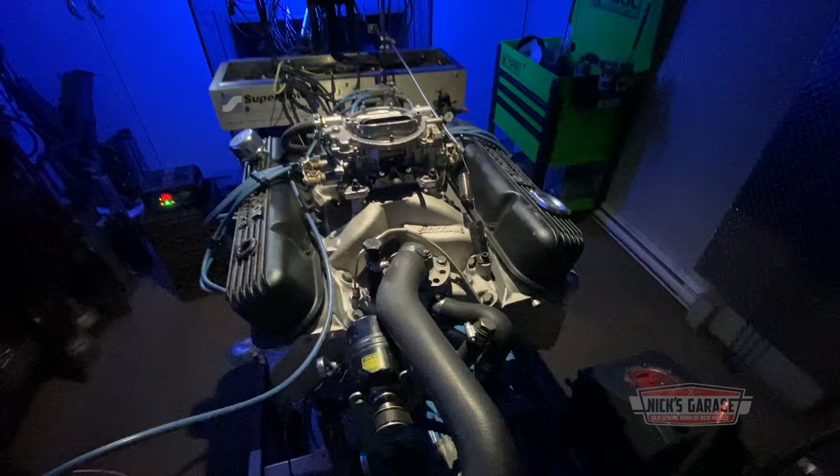Hey guys, we're back in the dyno room with a 360 stroker. Question is, are we gonna get the same power of a Hemi out of this small block stroker?

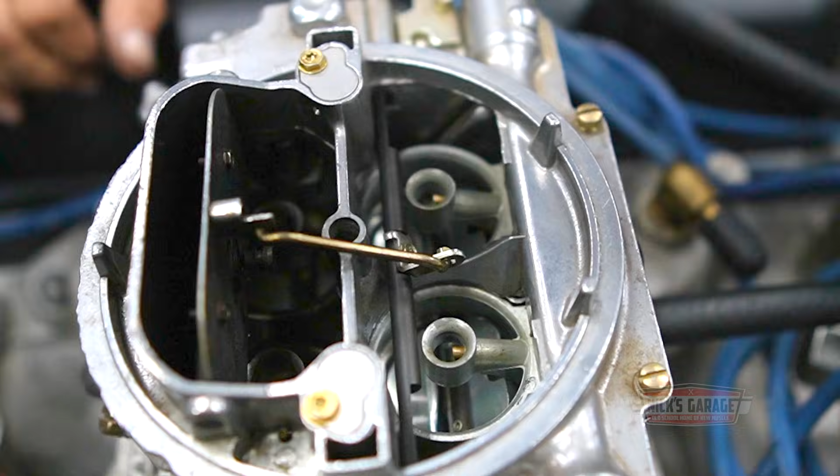Hi, I'm Nick. Welcome to my shop. And yes, here we are, back in the dyno. Today on the dyno for testing is this 1974 Chrysler small block that started life as a 360.

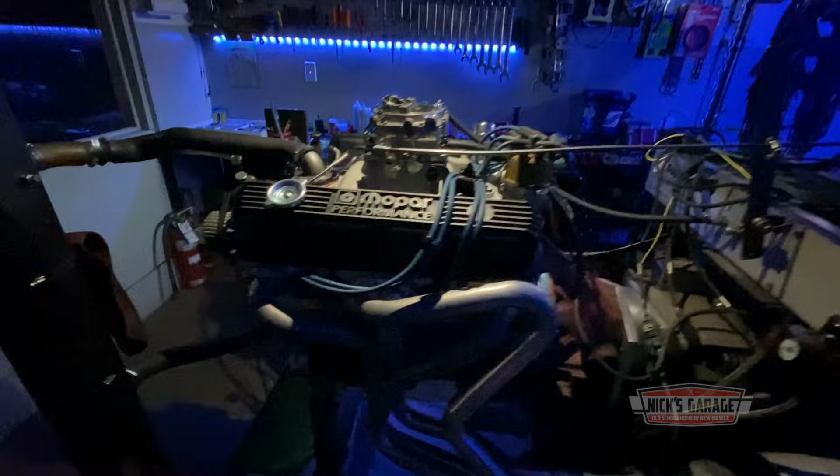Jeff with the Barracuda from Ontario brought it in. He told me put the engine on the dyno, see what it does. We found a few problems with it. First, when we had to test it, didn't make much power. Second, he lost oil pressure when it got hot and it went to idle and dropped under 15 pounds of pressure. So he told me, tear it apart, Nick, and let's build it.

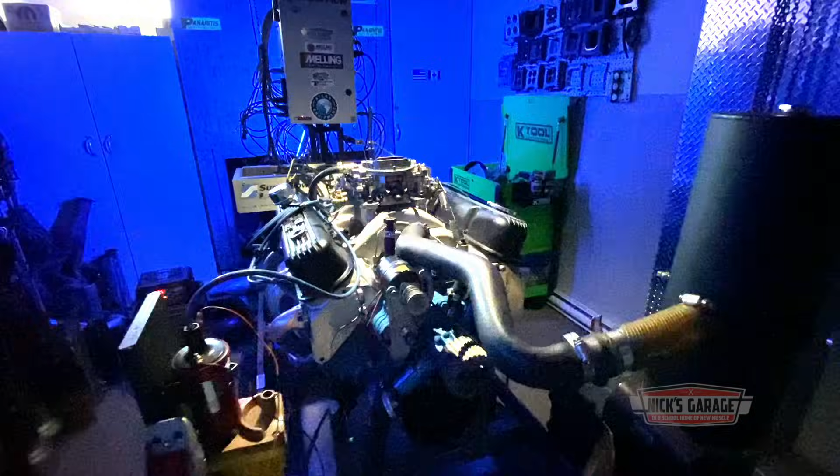When Jeff bought the car, he was under the impression that the 360 had been stroked out to a 408. But when Nick pulled it apart, he found out it was still at stock displacement. It was just a basic 360 with the Edelbrock heads. So he told me to overhaul the engine, buy a stroker kit, install it, and make it a 408, which is right now a stroker engine, 408 cubic inch. Now the engine is what it was supposed to be and has been built to Nick's standards.

It's time to find out what kind of power and torque it will make on the dynamometer. So all we have to do today is warm it up, get it running, mix up tests with this Edelbrock 750, and then see what power and torque we're gonna get. After that, we're gonna go to the 750 Thumper. I also have his original carburetor that came off the car. We're gonna test them all, and whichever works best will end up in the car.

So this is what we got. He wanted to stick with a small block. It's a '74, a low horsepower engine from the factory. So what we got here is something a little bit more different and more towards his specs. So let's hope it does well.

So we're going to do some dyno testing, and we got some special guests from Tennessee, USA. We got Rod and Irma from the USA, and they're here to see us doing a show. At the same time, we're going to do a little video on it.

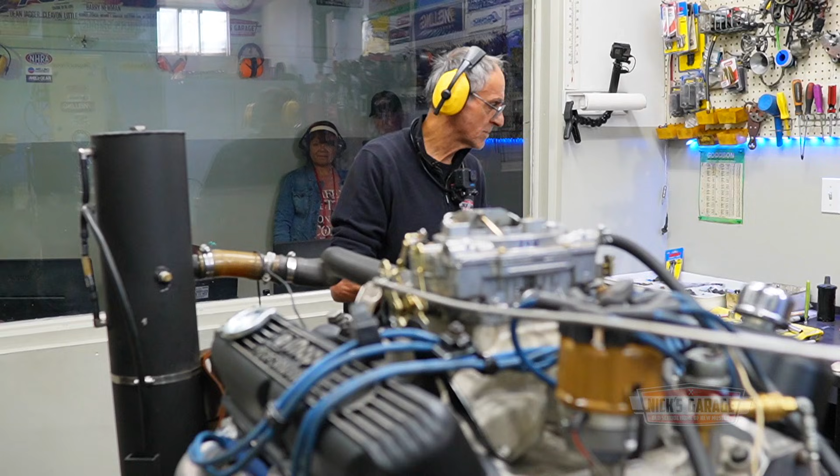Shut the water pump so I can get it warmed up. Oil pressure is good. Vacuum's good.

Okay, let's see what it's gonna do. Oh, battery voltage is up. Take a look at that. Bring it right back.

Check the timing before we go anywhere. The air fuel ratio seems to be good, for idle that is.

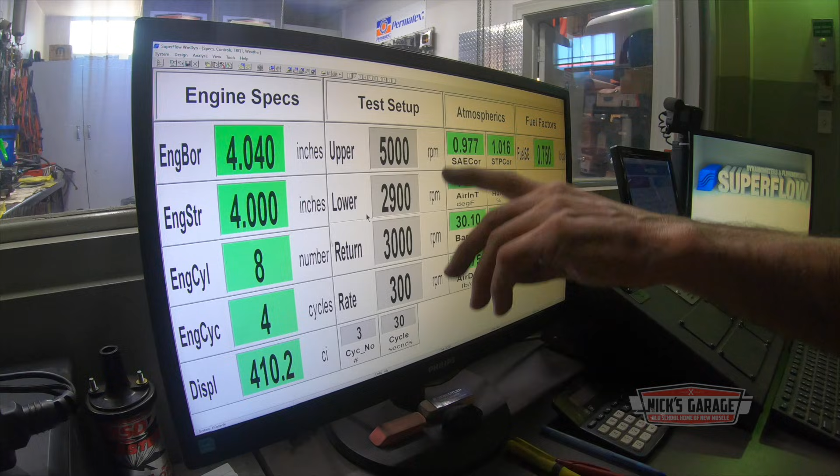I'm going to take the test at 2,900 to 5,000 RPMs, at 300 RPMs per second. Here we go, you guys ready? Let's see if I don't need to adjust the absorber. Well, you know, this is not going to be an official test. We just have to heat up the block, heat sink the block.

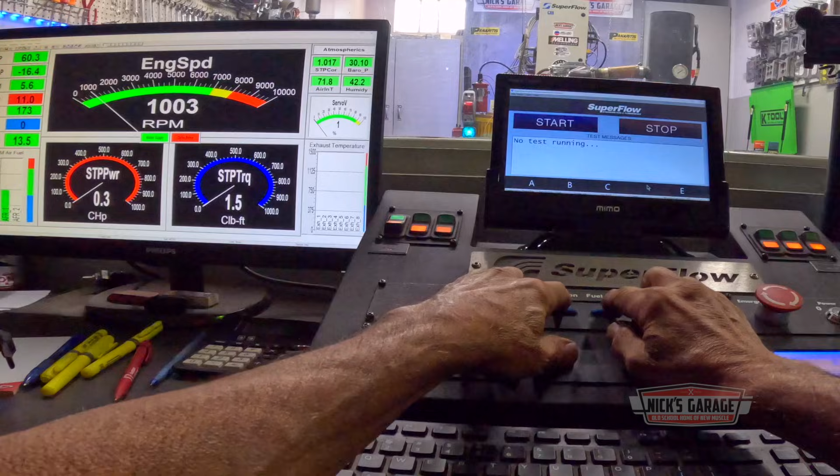Take a look, so far so good. Let me check the oil pressure. We lost oil pressure on idle hot oil. We had just under 15 psi on this particular engine, but now that we had the crankshaft replaced with a stroker and all new bearings, new oil pump, this is our oil pressure on idle.

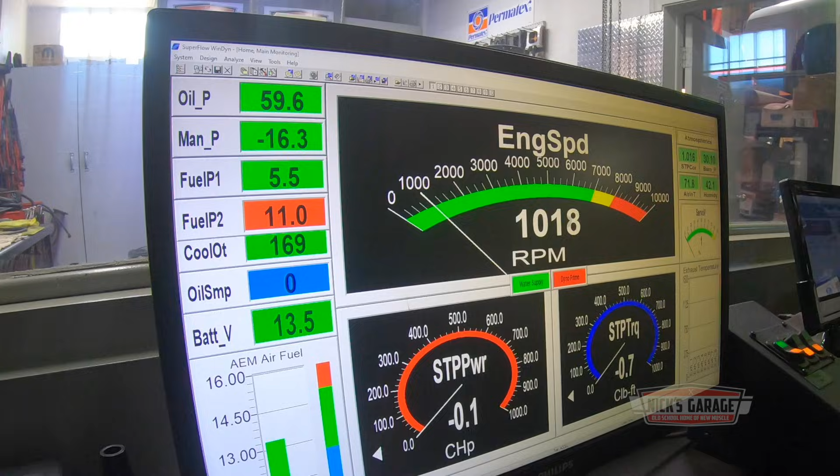Now that the oil is warmed up, I got the timing fixed up, and now we got a 750 Edelbrock. So we're going to do further testing later on, but with the Thumper carb. Right now, let me do a few tests with the Edelbrock. Air fuel ratio, it's on the rich side.

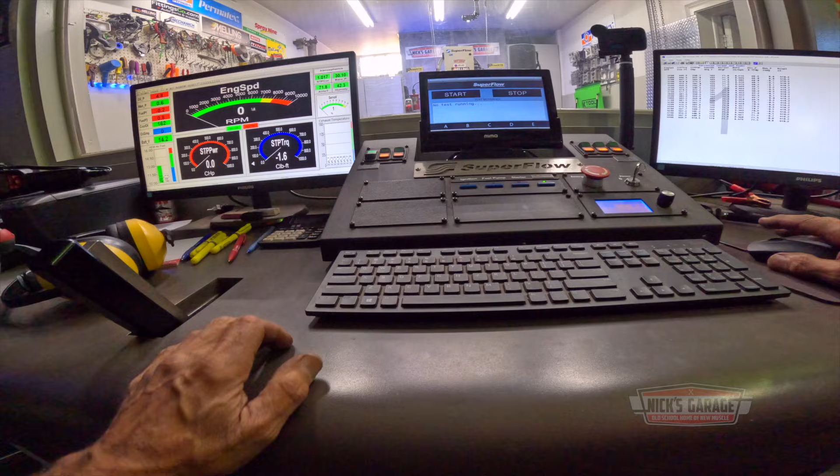Okay, I'm just going to make one more run. And it seems like we're going to have to go higher than 5,000 RPM. So here we go, we're going to bring it a little bit higher. We're going to take it to maybe 5.5 or 5,300. Here we go.

Okay, is it loud? It's kind of loud, eh? It sounds good though, okay.

I'm going to do another test back to back. Looks good. The air fuel looks a bit on the rich side, but anyways, you know what, we're not going with this carburetor anyways. I'm going to try the Thumper later on, and after that I'm going to try the client's carburetor that he has here also. So we're going to go through some carburetor tuning here today. All right, I'm going to do another test back to back.

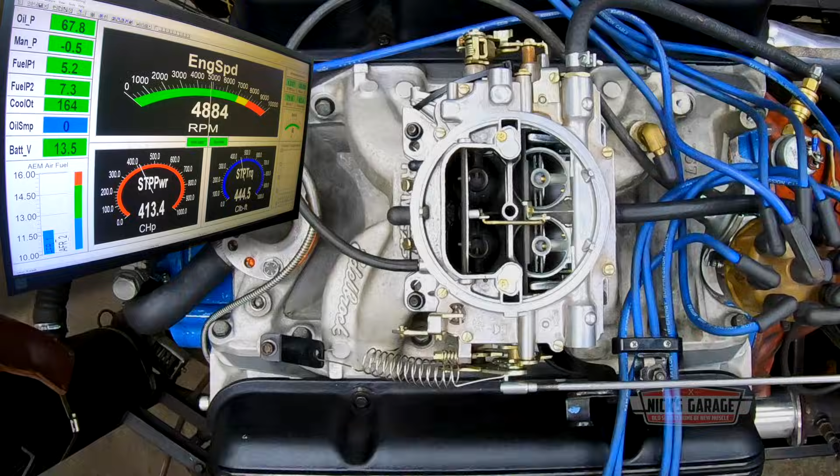Stopped at 52, 53. Wow. You know what they say, 1 horsepower per cubic inch is pretty good. Here we are at 415 HP.

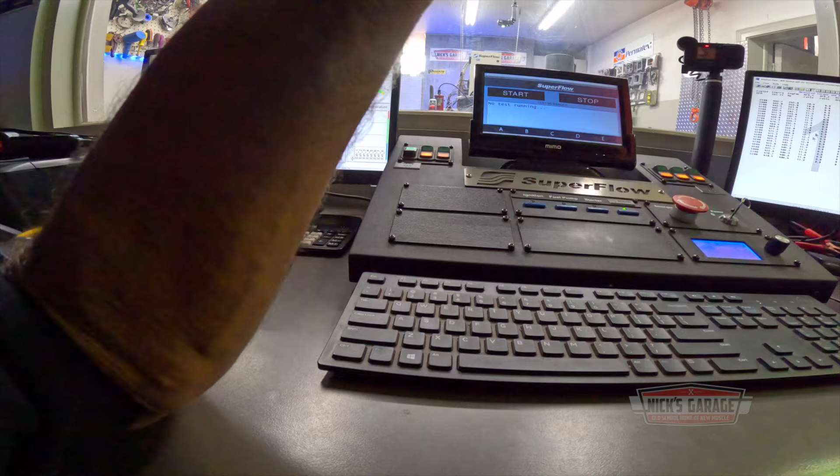We're still going to play with air fuel ratio. It's kind of on the rich side. Yeah, it's very rich, 11.8, 11.9.

So I'm going to take off this carburetor and go with the Thumper. Then I want to go with the client's carburetor, back to back, because why buy a carburetor when his carburetor works? So we're going to tune it on this, but I'm just trying a few carburetors. I'm not going to take this apart.

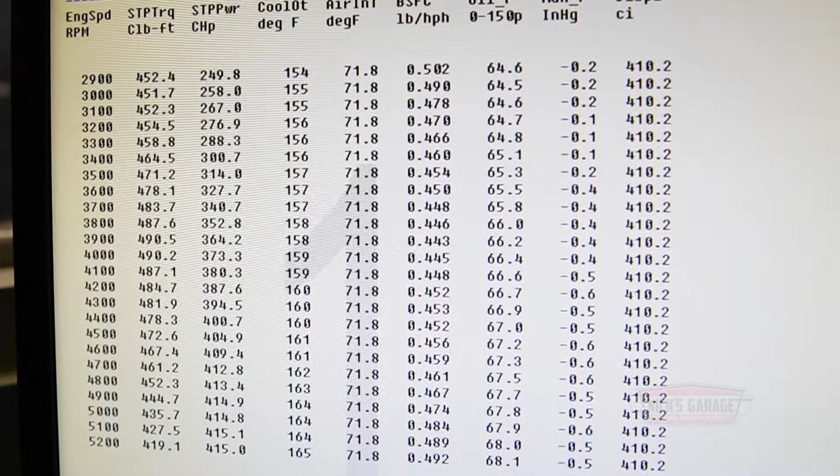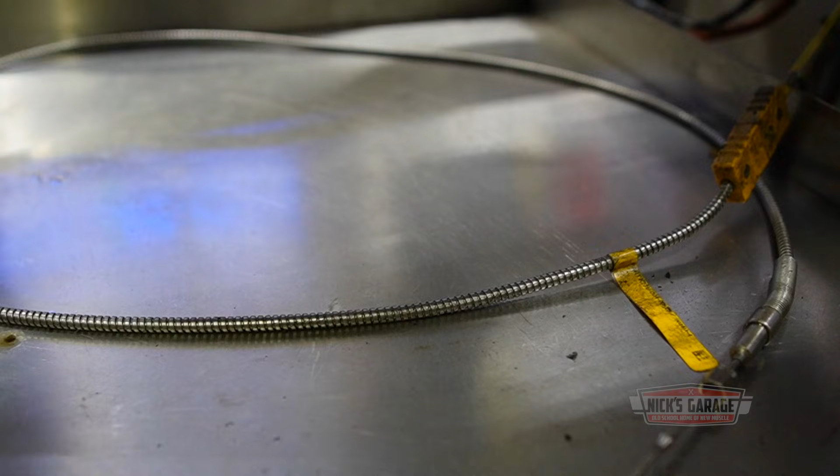It's running on the rich side. We have 415 HP, and already 452 foot-pounds of torque at 2,900 RPM, which is pretty good for a street car. So we're running rich. Timing is good, I'm going to play with the timing after with this other carburetor. But in the meantime, I'm just looking for any major problems like oil leaks, vibrations, and vacuum leaks. So far so good. So I'm going to take off this carburetor, put on the Thumper, see how that goes. Then after that, we're going to go with this other carburetor.

Jeff's 408 is off to a great start on the dyno.

Rod and Irma from Tennessee picked a perfect day to drop into Nick's and hear some MOPAR music. The visitors get back on the road, off to enjoy one of Montreal's wonderful restaurants, as Nick gets back to work on the stroker.

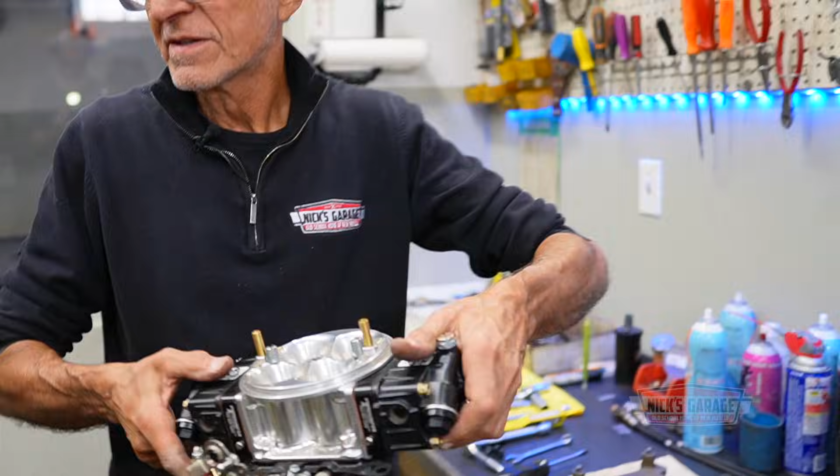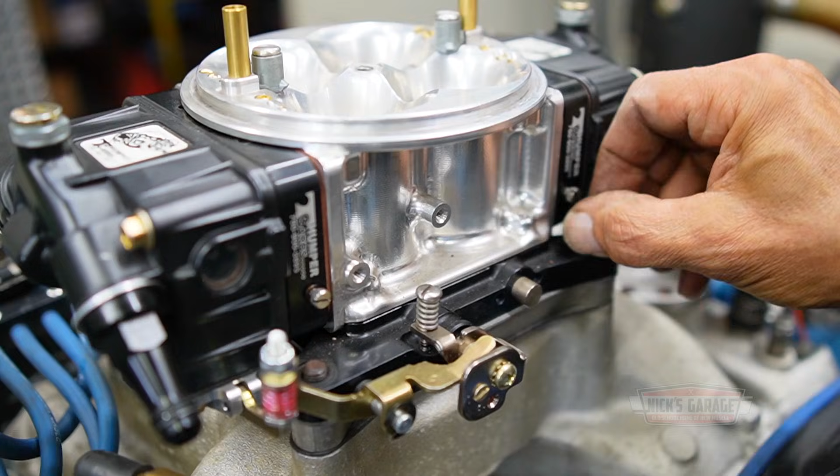Put a vacuum port on it so that I can get a reading on idle.

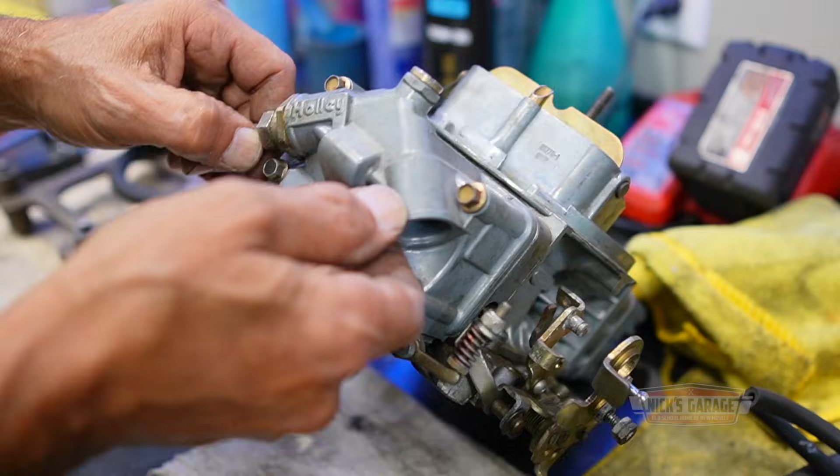Okay, I just installed a 750 double pumper from Thumper. I just want to try it just for the fun of it. Then after that, I want to go back to the original carburetor that belongs to the client, which is right here. I just got to figure out what CFM this is, which I'm going to look up in a few minutes. But in the meantime, let's make a test with the Thumper. Okay, let's get started.

Well, the previous carburetor was running too rich. Maybe this one might run rich too, but I'm not going to start taking apart carburetors because I really want to tune it with my client's carburetor if it's the correct size. So I'm going to look it up after a couple of tests here with the Thumper, then we'll take it from there.

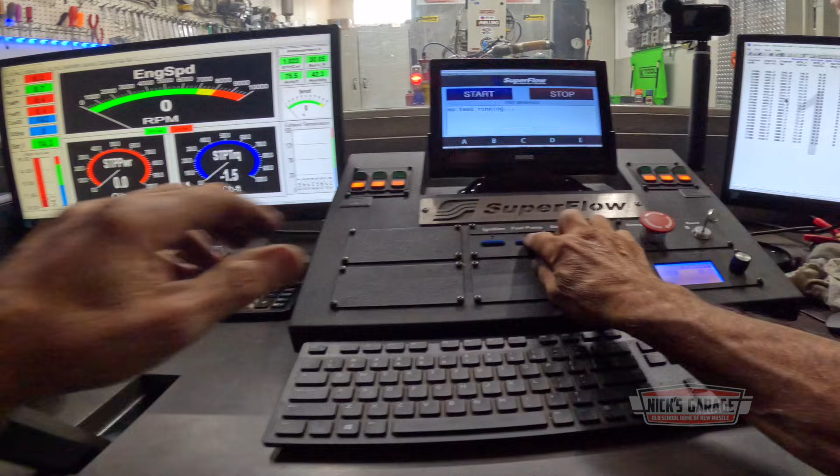Well, we need some fuel in the carburetor. Here we go, here we go. Looking good so far? So far good.

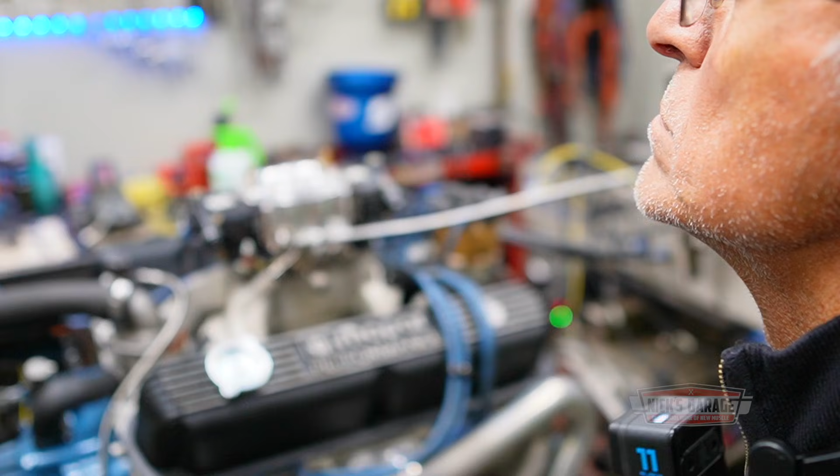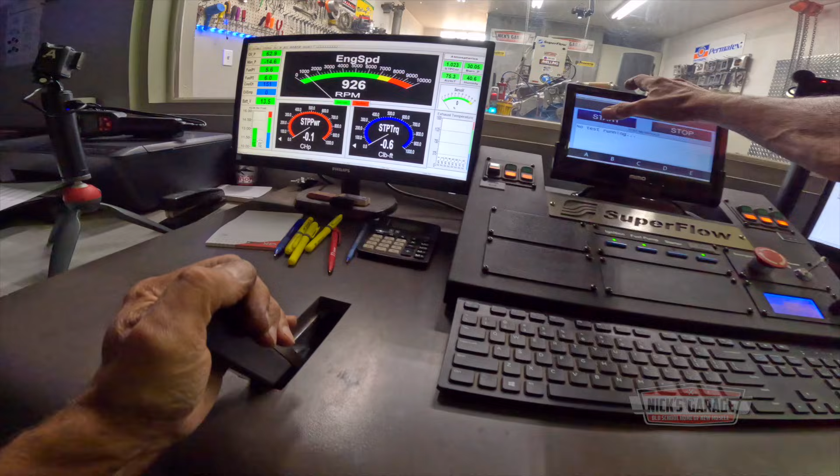Pressure is good, okay, let's make a test. So we're going to run the same parameters, which are going to be, I believe, from 2,800 to 5,300. Okay, here we go, let me just write another block here.

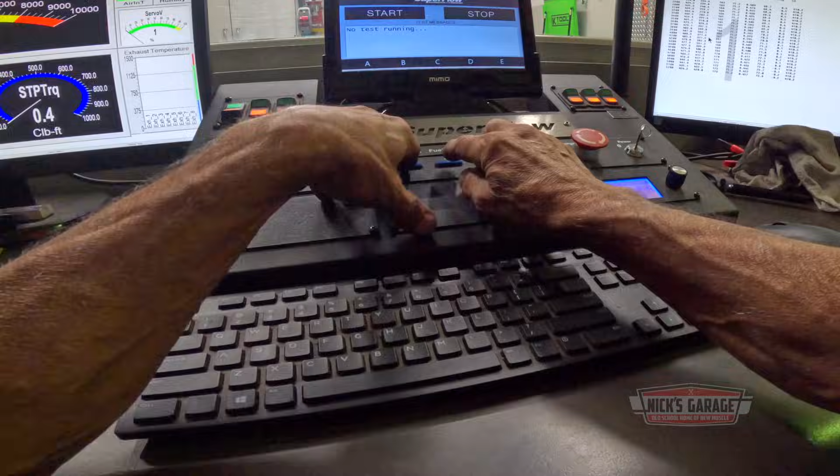Wow. And what's the noise level? 115.5, that's pretty loud, isn't it? It's too high, too high of course. This is very loud, that's the sound of the engine on the dyno. 115.5, okay, so we're on the books on this one.

Okay, all right, here we go. Okay, this one ran, it's still running rich, but we got some good horsepower on this one. The torque came in at 473 at 3,600 RPM.

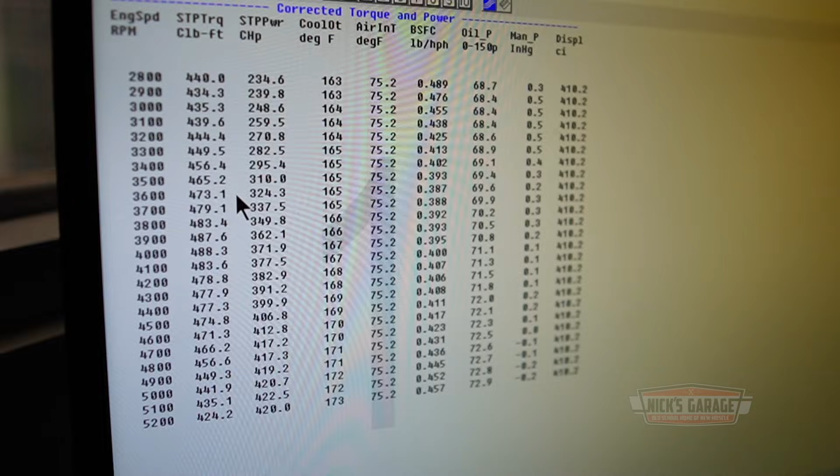Okay, so we added like a 1/4 inch or 3/8 spacer on it. We got some good torque numbers on it, and the horsepower came in at 422.5 at 5,000 RPM. I'll bring it up to 5,500 RPM, make another test.

It is running a bit rich, but then again, like I said, I am not gonna tamper with this carburetor, I'm gonna work with his. But first, let's see if his is a 750 CFM, and then we'll take it from there. This is good, okay, here we go.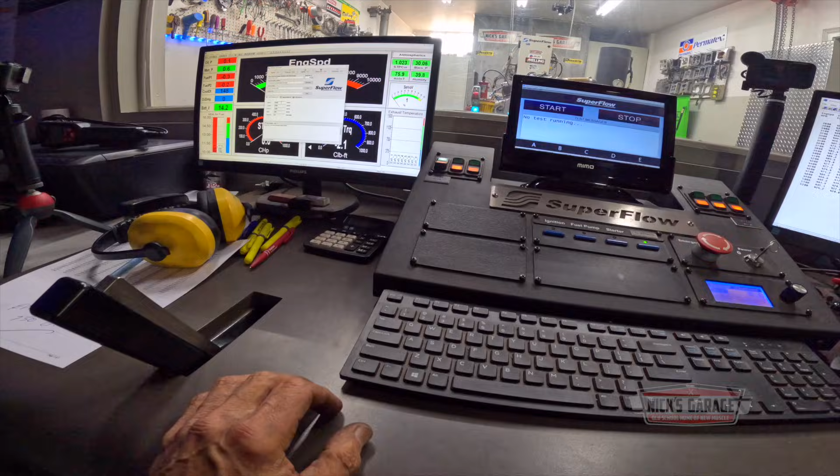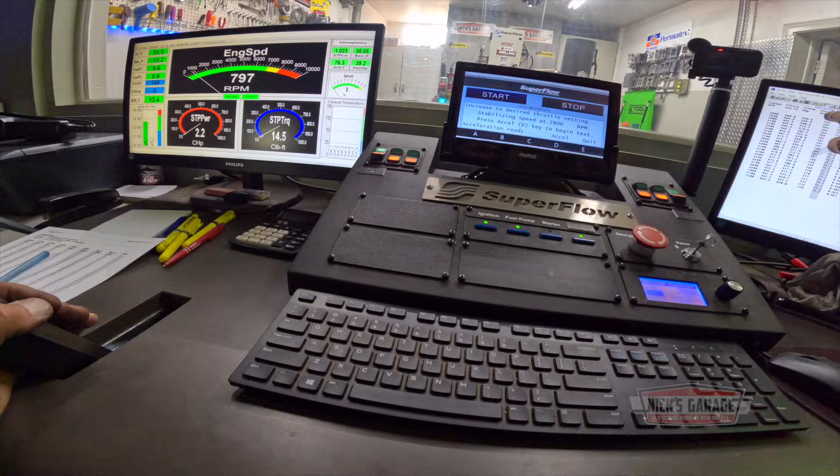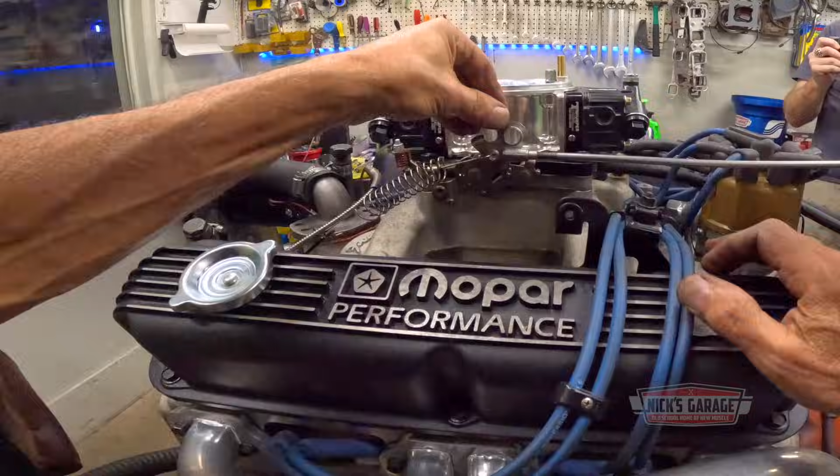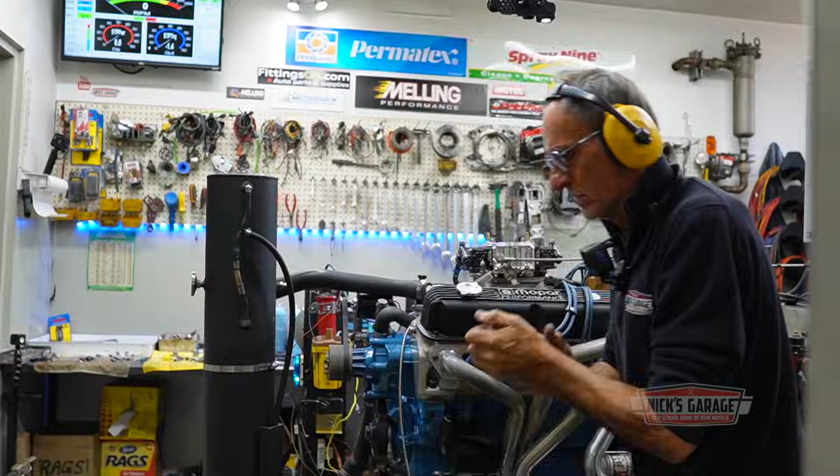Okay, here we go. Put the fan on, George, please. Want to make sure I got full throttle. I'm ready. Come on, here we go.

Wow. We've got some Hemi numbers on this one. 490 foot-pounds of torque at 4,000 RPM, and the horsepower 424.5 at 5,100 RPM, just like a Hemi. Is that something or what?

This is beautiful, that Thumper carb seems to be working even though it's running rich. This is great, this is great, this is good. It's got a Hemi here, it's got the horsepower and torque readings of a Hemi, practically at the same RPMs also. Anyways, that's great, but I'm not gonna leave it with this carburetor. I'm gonna try his carburetor now, so let's make another swap. Here we go.

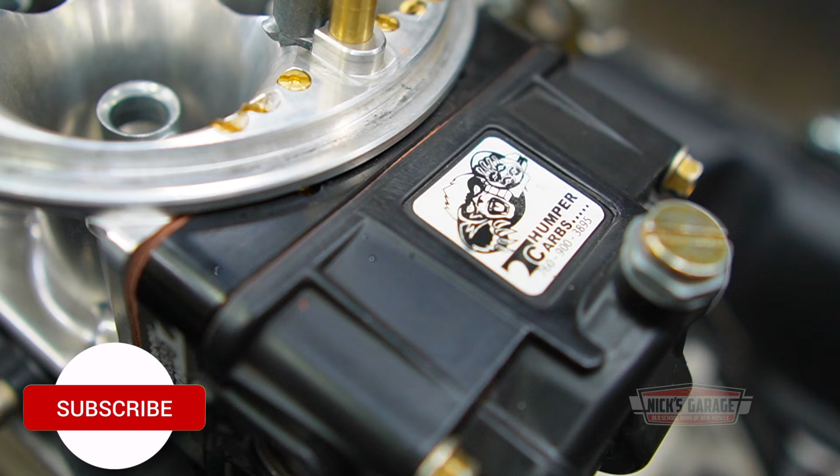Now we're going to his carburetor. I'm just curious, I'm gonna put his carburetor here and look it up, see if it's a 650 or 750 or whatever. I'll be right back. Then we're gonna try his carburetor, but most likely we're gonna stay with it. I'm not sure, let's make a test and see how it goes.

I guess it's an old carburetor. Anyways, we'll find out, let's look it up on the internet. Here we go. Looks like a good carburetor, 770 CFM. Looks like he's got enough CFM on this. Okay, so we're going with this carburetor today, 770 CFM. Let's put it on and see how it goes.

This is a vacuum secondary, which I recommend for street use. Sure, for all-out racing a double pumper will make more power, but I don't recommend a double pumper for a street car. Right now I'm going to tune it. I know this has the potential of 425 horsepower, 490 foot-pounds of torque, but let me just tune it with this carburetor in case we stay with it or not. Since I've got it, let's make a little test and see how it goes. This is what the dyno room is for.

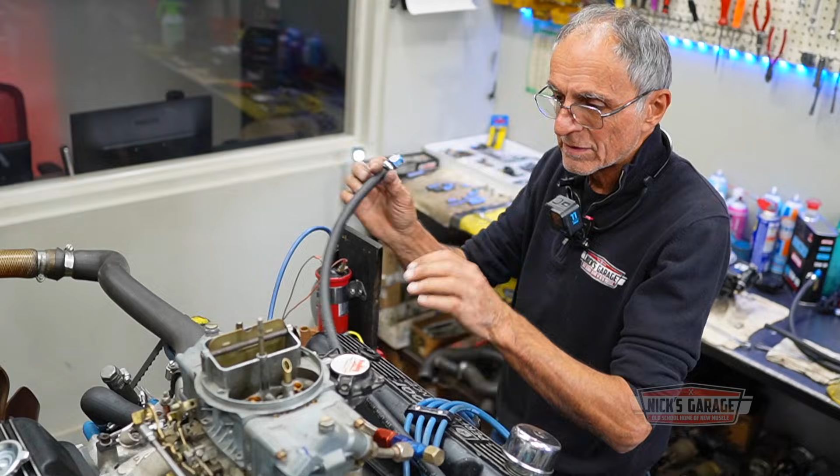All right, we've got the 770 CFM carburetor that belongs to Jeff. This is what came with the car. This is what I'm going to tune it with because I got enough CFM on it. So let's make some testing because I want to see the air-fuel ratio on full throttle, and at the same time I'll be tuning it. So it's going to stay with this carburetor, I'll tune it with this carburetor.

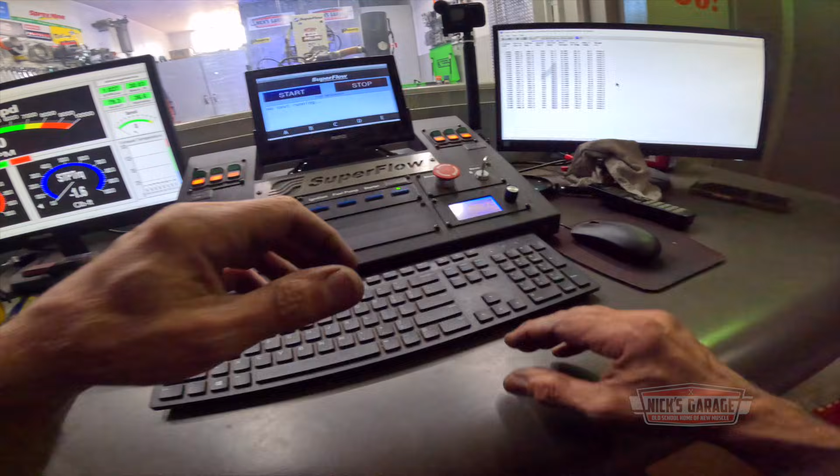Okay, it's running lean, lean, lean, lean.

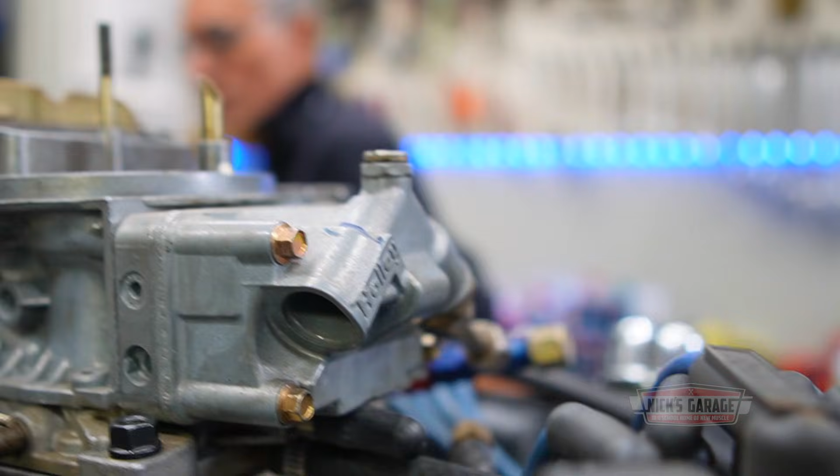Okay, let's make a test. Let's see how this one performs. Here we go.

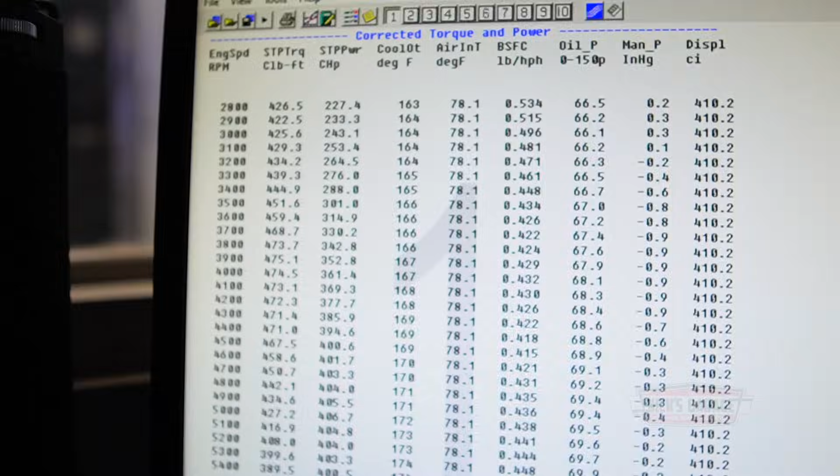Sure everything goes good, okay, with vacuum secondaries. Oh wow, makes a big difference from double pumper to vacuum secondaries.

Okay, now I'm gonna talk to my client about what he wants to do before I go any further. With his carburetor, I'll just make another test back to back. Let's check the air fuel ratio. It's 12.4, 12.5. He's off by a little bit, running a bit on the rich side. I'll just make another test back to back and we're gonna see from there.

I'm sure he's gonna want a double pumper. I'm not sure, you know what, I'm gonna have to call him tomorrow and get into details with him. In the meantime, I don't know what to do right now. Let me go into carburetors, I'll give him a call.

So I'm gonna make one more test with this carburetor with the vacuum secondaries, which is a perfect street carb. Maybe he's looking for power, maybe more torque. He does have a stroker kit, maybe he wants to go with a double pumper like the Thumper. I'll just make one more test with what he's got. I know this engine has the potential of 500 foot-pounds of torque, and with the correct air fuel ratio we can get 430 horsepower with 500 foot-pounds of torque with any 750 double pumper carburetor.

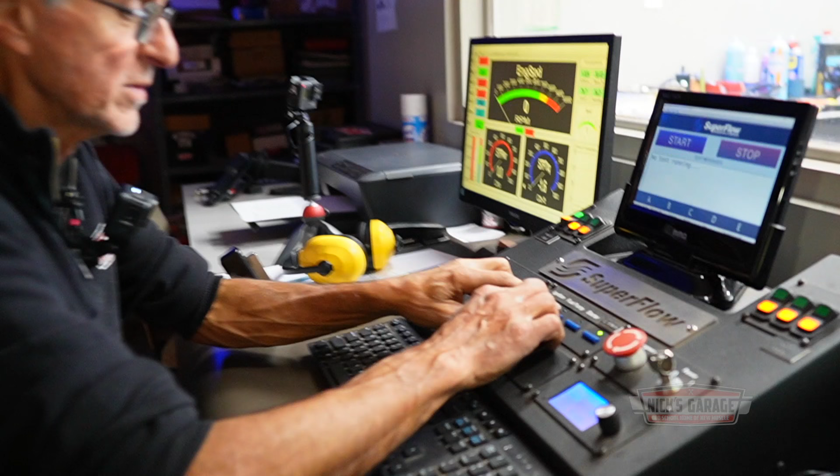But in the meantime, this is what I've got, this is what it looks like. It's gonna look good, and I'm gonna make one more test with this carburetor so I can give him the results and then take it from there. Here we go. I don't think he's gonna go with this carburetor, I doubt it very much. Okay, here we go.

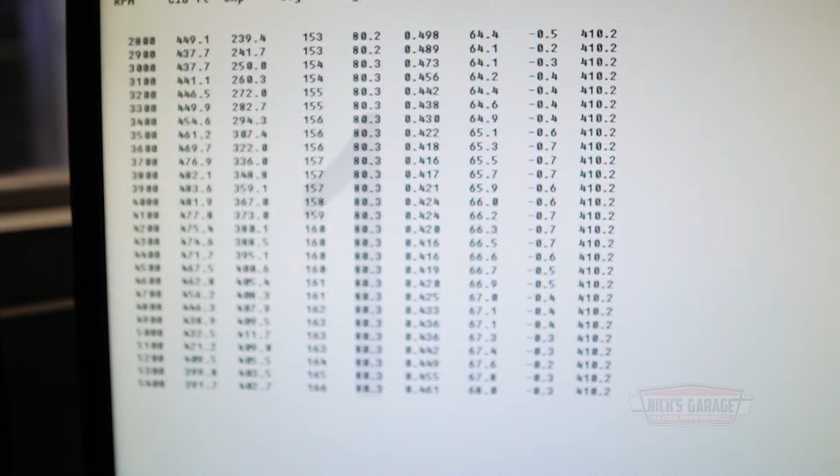Oil pressure is good. Yeah, 412 HP, torque numbers are 482, 483. Hey, not bad, not bad, it's getting there. Maybe with some fine tuning on this carburetor, I might get close to what I got with the Thumper. But in the meantime, I've got work in the shop, a lot of things going on. Before I do anything further, I need to get in touch with my client Jeff and see what he wants to do with it.

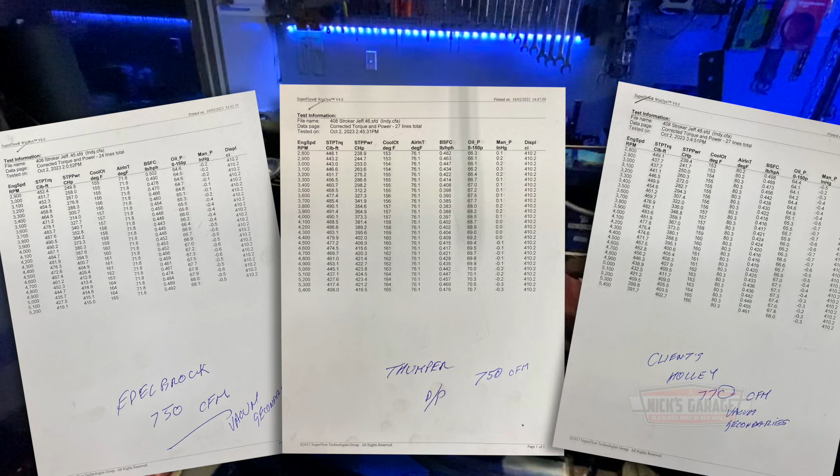So now, thanks to Nick's hard work, Jeff has a real 408 stroker for his Barracuda, and he has some options for which carburetor to use. In the meantime, this is what we've got, it looks pretty good, a lot more than what he had last time. He's got the power and torque of a Hemi, and I'm sure he'll be satisfied with the small block. So thanks for watching us here on Nick's Garage.